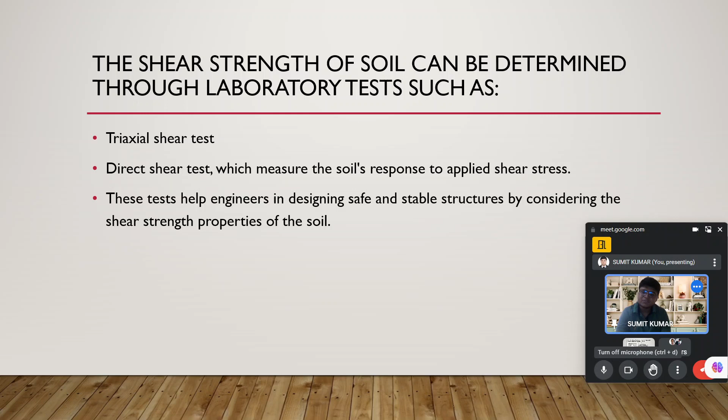This session basically started with the shear strength of soil, and we discussed the shear strength, what it is, and on which parameters like cohesion and angle of internal friction it depends. We also discussed the different types of tests performed on soil, that is the triaxial test and direct shear test. We also took into consideration the vane shear test. Today we are going to solve problems on the direct shear test and vane shear test.

We have understood why shear strength is so important, that at every aspect we are talking about the value of shear strength and how it is important in any of the structures. Because if we are designing the superstructure, we must be aware about the substructure characteristics. Afterward we can say this much load can be taken by this structure, and on that basis we can act.

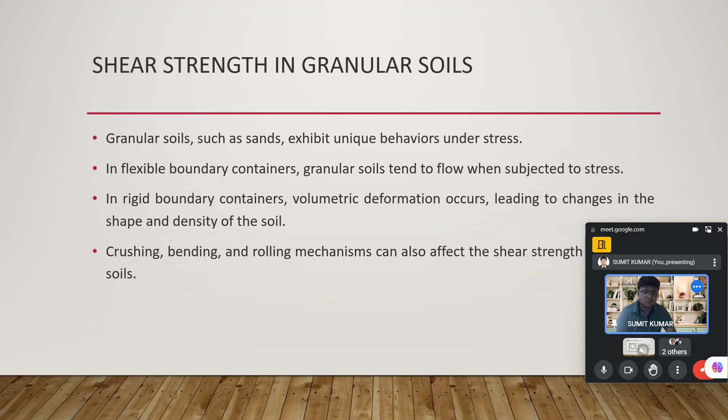So we need to be aware of how we can control the superstructure on a soil by providing those aspects, specifically for structural engineers. So shear strength plays the most important role, depending on cohesive and cohesionless soil. We discussed what parameters govern cohesive soil and what parameters help in cohesionless soil. Apart from that, we also understood that shear strength is the most important key factor in designing the foundation, slopes, retaining walls, and any geotechnical structure.

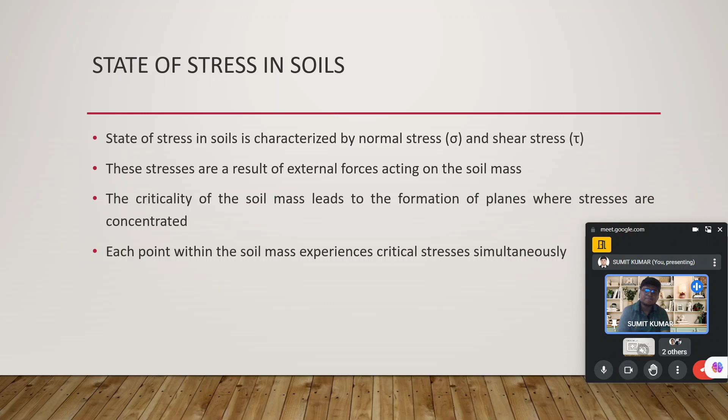We interrelated the relation between normal stress and shear stress. We developed concepts about at what section the soil actually gets failed, and after that we took the concepts of the parent body and detached body. We have discussed this many times, and we will also discuss it again wherever needed, because it is the basic concept from which we are going along.

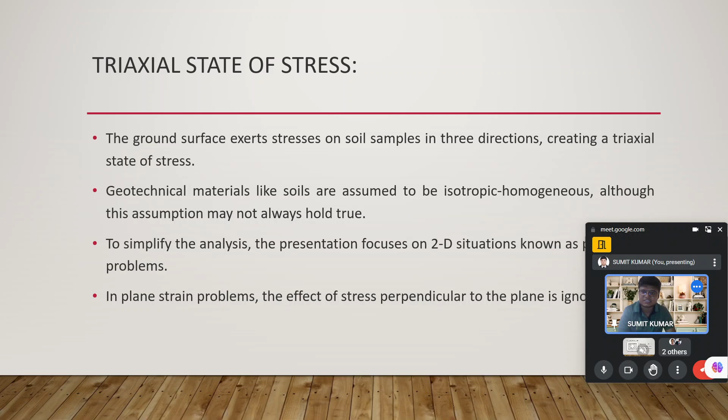I think these things are well understood by you, so I am going in a faster way. This revision session is only for 10 minutes, afterward we will go to a new section. We have seen that the stress is actually acting in the triaxial direction, but we will generalize in two-dimensional cases, and we have discussed those cases.

We interrelated the value of, if we know the two normal stresses in two perpendicular directions, how we can find the stresses at any angle from those two sections, given with this interrelation. We understood the Mohr circle, how it helps, how the center of the Mohr circle is found, how the radius of the Mohr circle is found, and what parameters govern the value of the Mohr circle, whether it lies totally rightward or totally leftward.

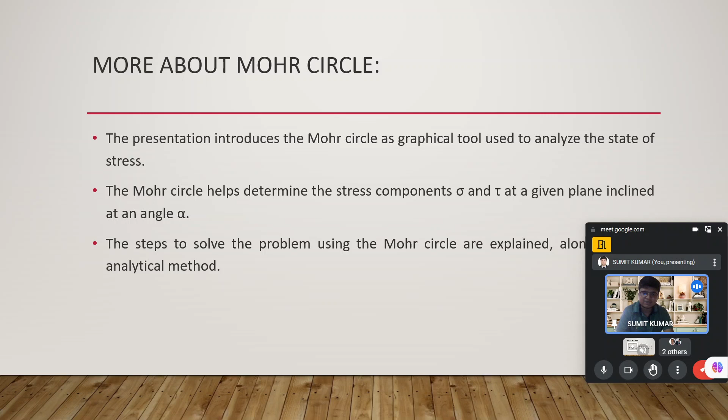We have also taken the cases when the points of the Mohr circle get formed. So those characteristics were discussed during our initial two sessions only.

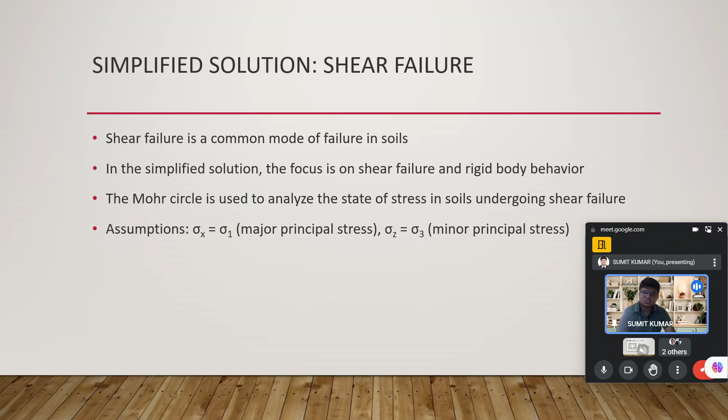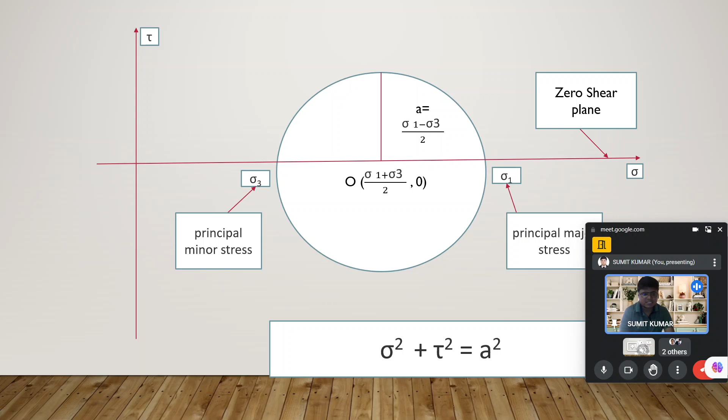We have understood how the Mohr circle gets formed, how the sign conventions work, and how the simplified solution can be developed on the basis of the complex parameters present in the soil. We have generalized the solutions and shown the Mohr circle analysis and the center of the Mohr circle. If we know sigma x, sigma z, or sigma 1, sigma 3, we can find the center of the Mohr circle, the radius, and respectively the major and minor principal stress, using the relation given below, and with that we can form the Mohr circle.

We can generate the radius, and on the basis of that we can also say that at a respective angle from this state of stress, what is the value of normal stress and shear stress, and what the given angle is, stated with the help of the equation tan 2 theta equals 2 tau by sigma x minus sigma z.

And we have solved these problems. I think these problems must have been solved by you at this point of time, so I will not take up the problem again in any case.

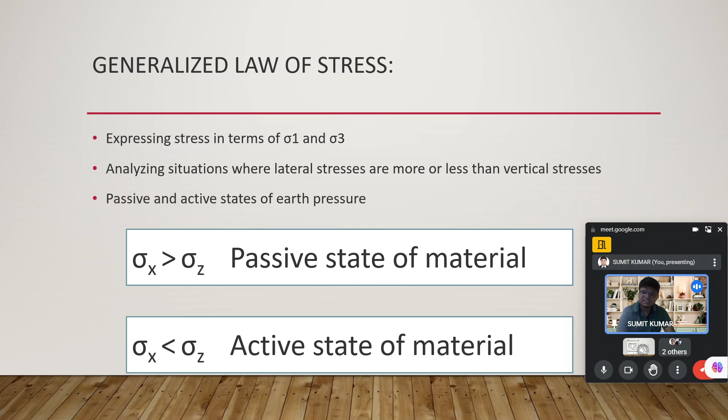But we have understood the value of when the passive and active states get developed in our study. The pole is that point through which all planes of the Mohr circle will pass. We have discussed this concept as well.

Afterward, we have tried to generalize our case, so how we are generalizing is also equally important. The generalization means we have developed the analytical as well as the graphical method. When I say analytical method, you need to understand what I mean by that.

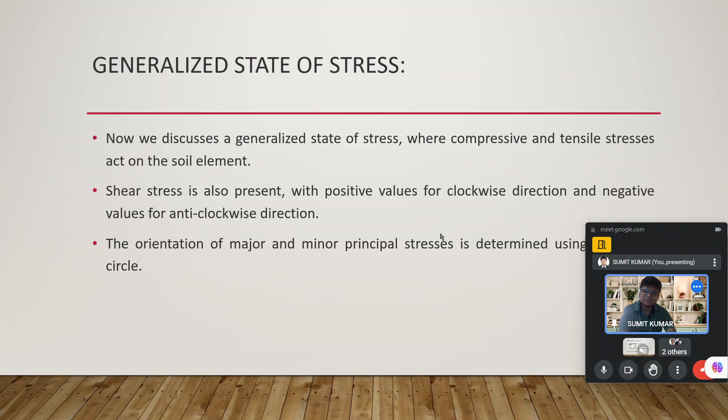Or what is the plane on which different types occur, like when we solve this problem - we solved this problem in the very first class. During this problem solving, we come to understand how the value of stress at any other inclination can be found.

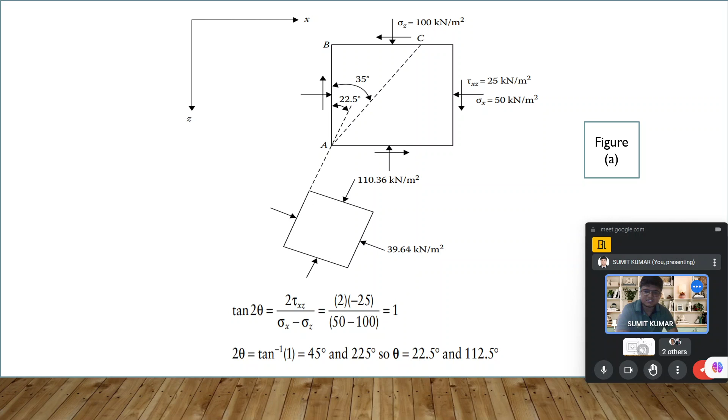And when we solve this problem with the help of the Mohr circle and the analytical approach, we found that the sum of the stresses in the two perpendicular directions, when found at another plane, remains constant. Like the value of sigma p1 plus sigma p3 is equal to 150. Here sigma z plus sigma x is equal to 150, and sigma p1 plus sigma p3 is also 150.

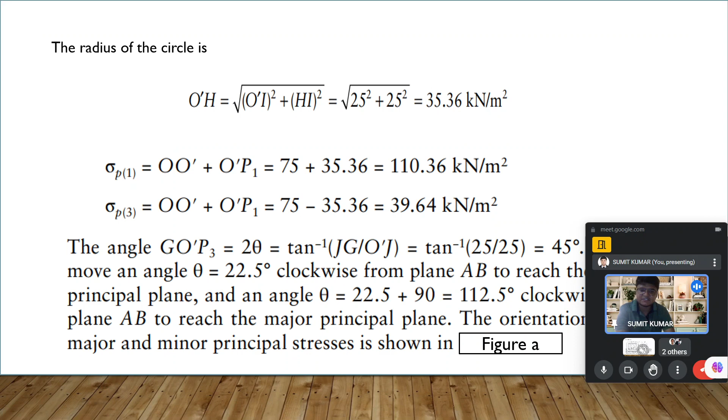So these concepts, why this is happening, we have discussed and understood in a very good way. We have solved the same problem with the help of the Mohr circle - I discussed this in great detail in the first class. You can go across those problems if you haven't seen it.

Afterward, we have understood that shear strength is a function of sigma, and when we say sigma, we normally take the effective stress because we consider the effect of water. We have drawn this diagram, where the intercept on the y-axis is the value of cohesion, and the angle made with the x-axis is the angle of internal friction. On that basis, S equals C plus sigma dash tan phi is our shear strength of soil, and this is the strength. If the applied stress goes beyond that, it will lead to failure of our soil sections.

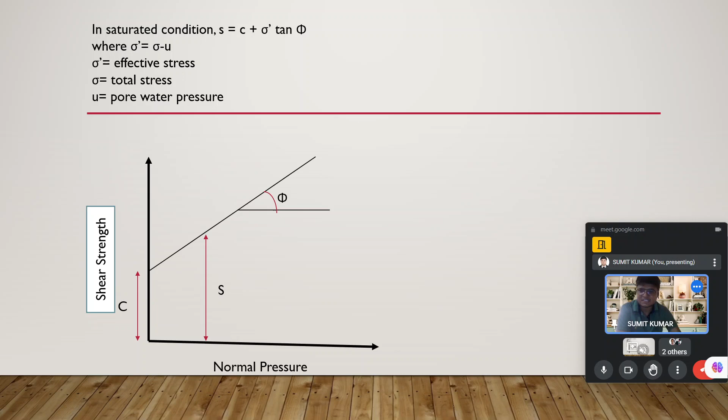And due to this only, the failure takes place. So I think up to this point the concept is clear. I will now discuss the second section to some extent, and afterward I will move to the new content for today, in which we are going to solve at least 14 to 15 problems.

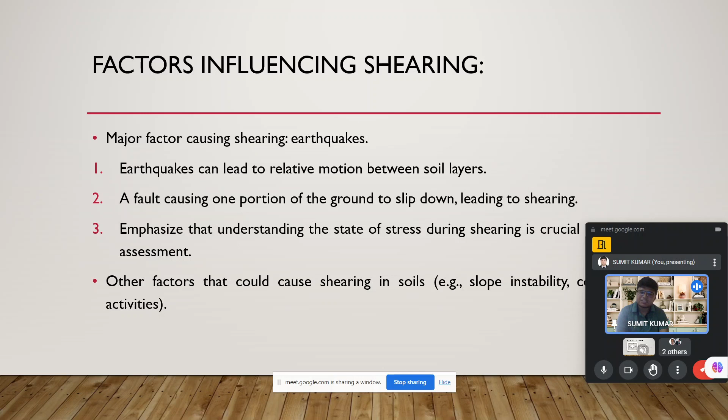Afterward, we studied the triaxial test. In the triaxial test, we perform the test to find the weakest plane. We know that from the weakest plane our soil gets failed. This is understood from the very first class, and I have discussed this again and again because this is the basic concept. Earthquakes can lead to the failure of soil, and other factors like slope instability and construction activity also lead to failures. We have a very good understanding of the application and significance of these facts.

Afterward, we discussed the Coulomb failure criteria. When talking about the triaxial test, we discussed this. Today, when we took the example and solved the problem, we understood that as the value of sigma 3 increases, the value of sigma 1 also changes accordingly, and on that basis, when a tangent is drawn to all the circles that get formed, we are able to find that failure takes place from this section only.

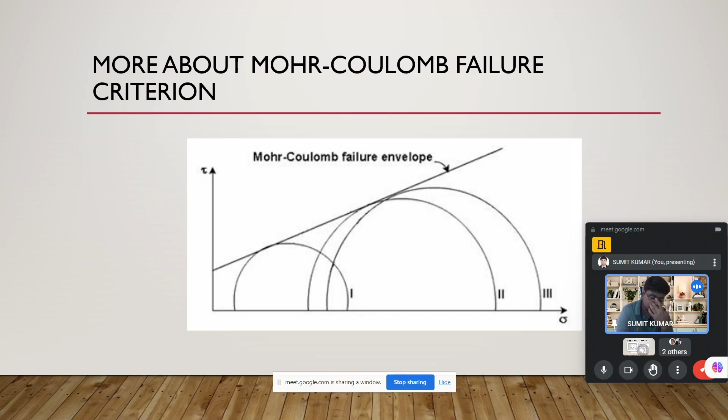This leads to a generalization. When I say generalization, what does this mean? It means one thing: that common tangent is the result of the tangent to all the Mohr circles. So the stress below that point will be called the safe stress, at which the soil doesn't get failed. But if the stress increases beyond that envelope stress, our soil must get failed in those cases. So we need to understand this, and we have discussed this in detail.

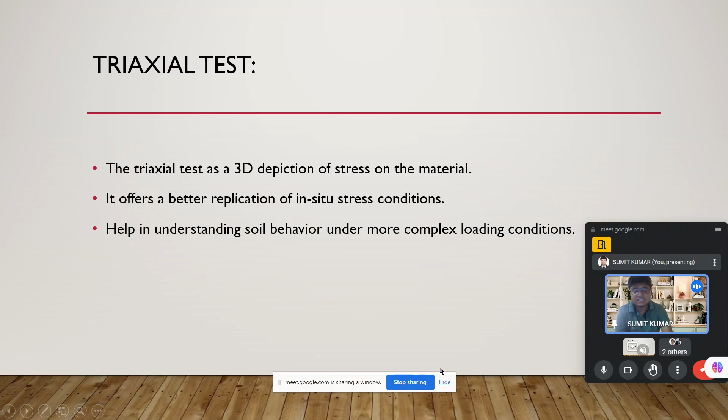Some more points we discussed about the triaxial test, like it being a 3D simulation, an actual representation. When we perform the test, we actually show what is really happening in the field, how stress acts from the three directions we have taken, and apart from that we also found that the stress acting in the field could be simulated in a laboratory in one way or another.

Those understandings get clarified with the help of this test. We also looked at how the apparatus is used, how the stress gets applied, the apparatus presentation, and how the cell pressure gets applied. We perform different types of tests, specifically three types: UU, CU and CD test.

How this takes place and what are the setups we have understood in a very good manner. There are two stages of the triaxial test. The first stage is basically the confining stage in which the cell pressure is applied, and the second stage is when the axial stress is applied, which is nothing but the deviatoric stress. I think up to this, every point is very clear.

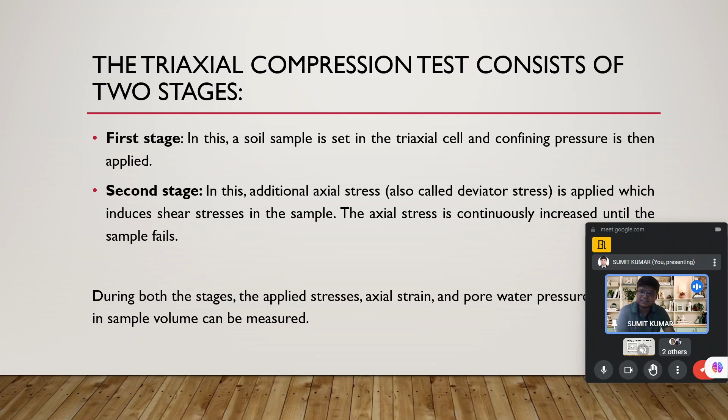First, sigma 3 is applied all across our sample, and afterward the stress in the third direction gets increased. When the third direction stress increases, the value of sigma 1 is found when the soil fails. So we are able to draw the Mohr circle with the help of sigma 1 and sigma 3, because sigma d is nothing but sigma 1 minus sigma 3. This is the apparatus which is already shown.

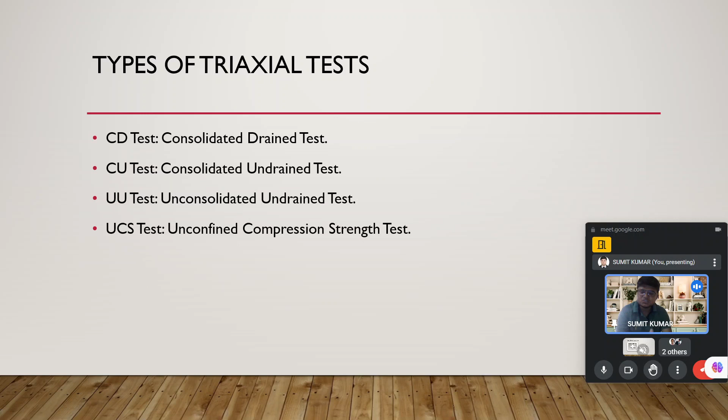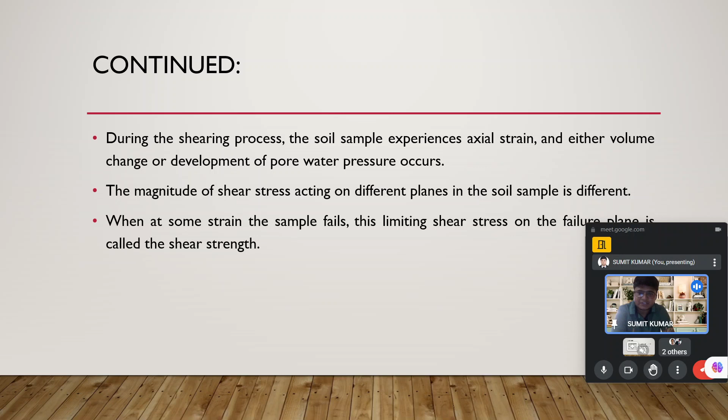We have discussed the purpose of CD, CU, UU and UCS tests in a very good manner during our previous session. We are able to find the cohesion and angle of internal friction, which are the shear strength parameters. With the help of that, we are able to state the property and strength of the soil in a real sense.

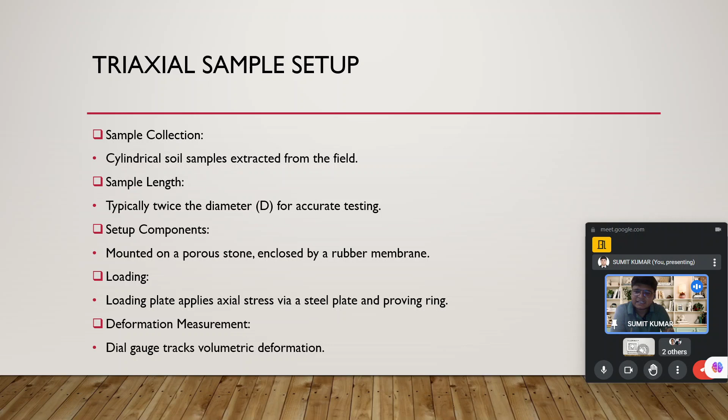Afterward, we studied advanced insights in triaxial testing, where we understood the different types of fluid which could be used in the confining stage, how the load could be applied, and the length to diameter ratio of the sample. We also discussed the different corrections applied, like Ac equal to A by 1 minus delta L by L, epsilon L, during our previous class.

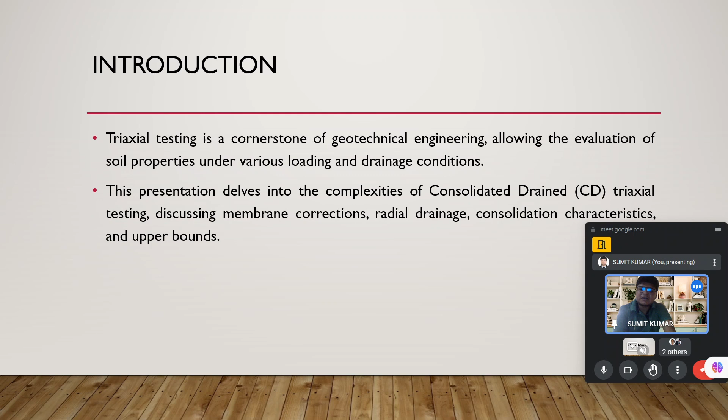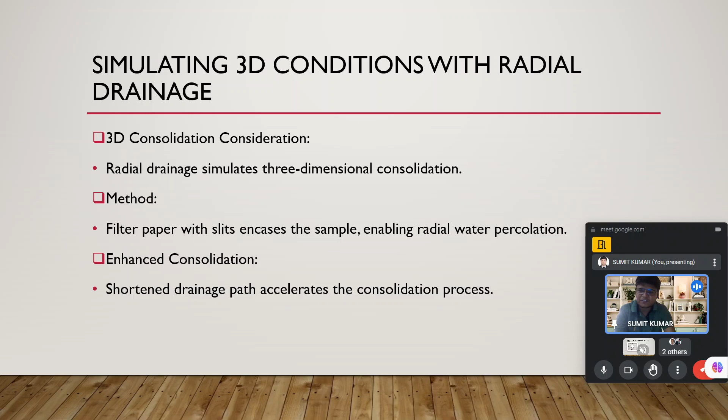So those points you get very easily if you were there during that session, or if you have watched it on YouTube. But in this fast manner you might miss those points, because we took a very good discussion of approximately 15 minutes on that during the last session, as that is the most important case. If you perform that test in the laboratory, you have to be aware about the corrections. If you don't apply the corrections, the value you get will be slightly different from what it should be.

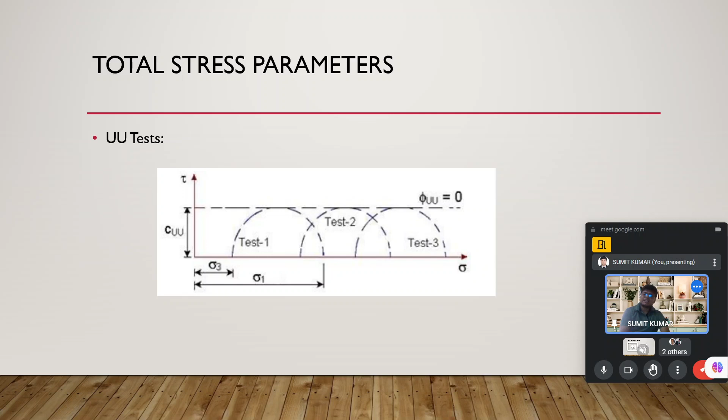Afterward, we understood the total stress parameter and effective stress parameter, and how the total stress parameter acts in the UU test, because in the confining stage and stage 1 and stage 2, the valves get closed and water is not allowed to pass, and the change in volume remains zero during this test.

Apart from that, we understood that when we are performing the effective stress approach, the value of C and phi give the same result for all cases, but this is not the case when we are taking the total stress approach. I think up to this point is very clear to you, as shown in the section written over here.

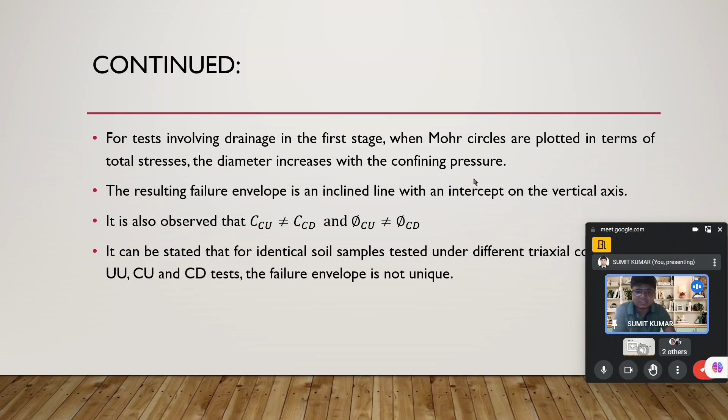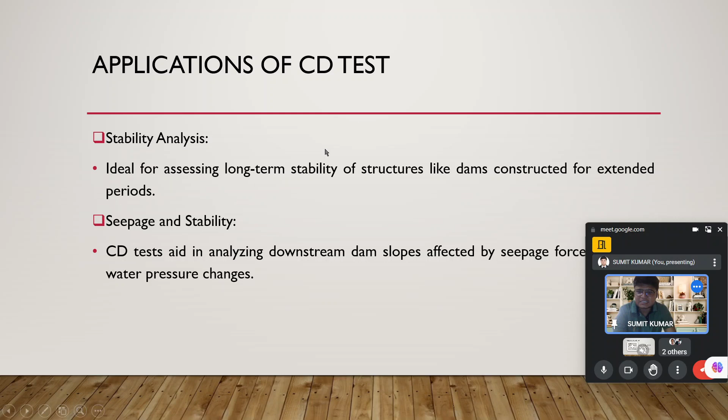And apart from that, we have also developed the relation we are going to use today to solve our problems. This is one of the most important relations, and you must remember it in order to solve the problem. The rest of the things were also used during the sessions.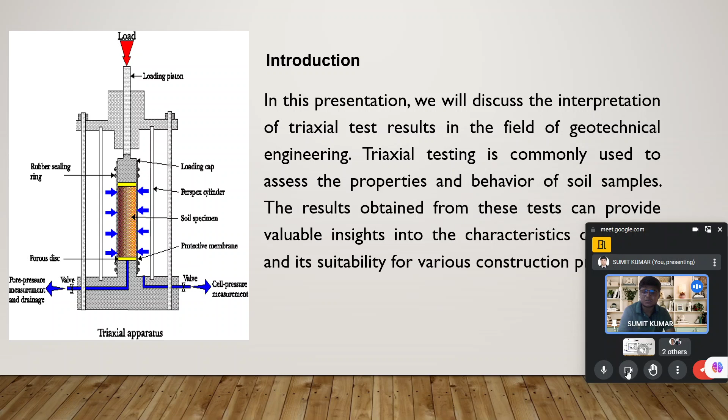There are several parameters we need to assess, and the person who is not aware about this test, who hasn't experienced these sections, may perform the test and give the wrong result. That's why sometimes site engineers prefer some other test over this. But this is also one of the widely used tests in the field of civil engineering.

Now, in our journey through geotechnical engineering, we delve into the analysis of compacted fill material using the triaxial test. This exploration sheds light on the critical interaction between compaction, shear strength, and material behavior. During the last class, you must be aware that we have taken material behavior very seriously.

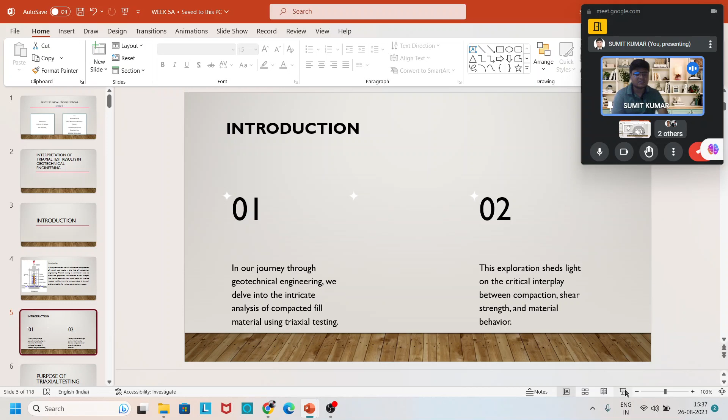During the last session, you must be aware that we discussed the material behavior characteristics which we are able to find during the testing of the triaxial test. Those sections were primarily the focus during that session.

Then we come to the purpose. From the starting class, the purpose and application is one of the important aspects. Whenever we discuss anything, afterwards we ask ourselves what is the purpose, and how we can apply this in the field in day-to-day lives, in civil engineering and different civil engineering works. These things are also among the most important aspects.

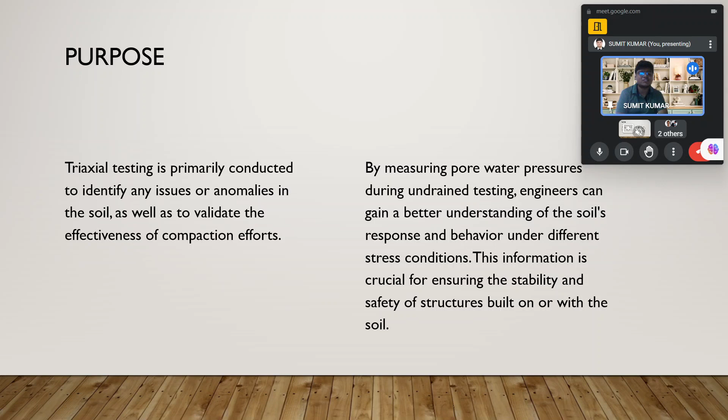The triaxial testing is primarily conducted to identify any issue or anomalies in the soil, to validate the effectiveness of the compaction effort by measuring the pore water pressure. As already said, we are easily able to measure the pore water pressure during triaxial testing, so the understanding of soil behavior can be found in a better manner, and the material characterization we are also able to find. The information we found is crucial for ensuring the stability and safety of the structure built on or with the soil. This is one of the important purposes.

The Mohr Coulomb envelope - the results obtained from triaxial testing are mostly used to develop the Mohr Coulomb envelope. We developed the Mohr Coulomb envelope during an earlier class, where we stated the value of sigma 3, and on the basis of sigma 3 found the value of the deviatoric stress. Afterward, with the help of deviatoric stress, we found the value of sigma 1, and on that basis we found the Mohr circle radius and the coordinate on the x-axis, the sigma axis.

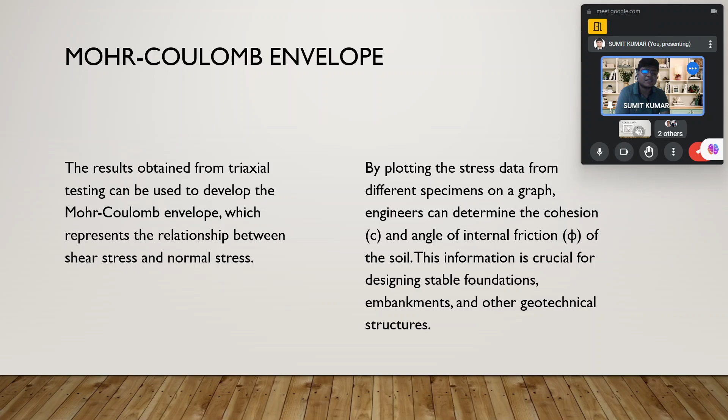By plotting the stress data from the different specimens on a graph, the engineer can determine the cohesion and the angle of internal friction of the soil, and this information is crucial for designing stable foundations, embankments, and other geotechnical structures. So these points become very important.

Now we talk about economic consideration. We have studied the purpose, application, significance, everything. But economy is also one of the great aspects if you talk about a country like India. We must be aware about these facts. Economic consideration is one of the good aspects we should be aware about. If we aren't, we make our structures more costly, and a country like us, which is developing in nature, has achieved so much feat in the field of science and space, as we have seen in the last month as well. But we must be aware about the economic consideration.

When we see the example of Chandrayaan 3, the cost is only approximately 650 crores. But when we compare that with the valuation of what different other countries are performing, they are spending too much, but we have achieved the same or more than what is achieved by other countries by spending much less amount.

So our achievement is also very bright in nature, because we have achieved that feat in an economic way. As a civil engineer, as a geotechnical engineer, we should be aware that whatever we are performing, economic consideration also needs to be taken care of, because if the economic consideration doesn't permit, we are not going to perform those tests or applications. We are not going to implement those things, because economy is one of the most important considerations when we are talking about projects of great concern, like institutional buildings or other important buildings. There, we might think the cost is not the most important factor, we have to develop those sections in a good way only, we are not concerned about the cost. But in day-to-day life, day-to-day constructions, everyone is concerned about the economy. So economic consideration is one of the most important aspects.

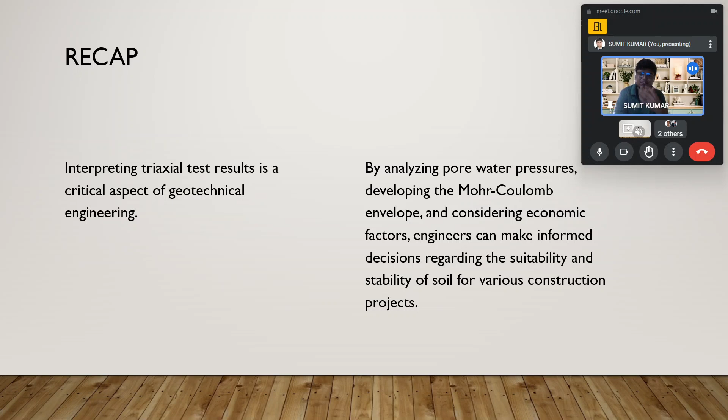Those points are written again, so I will recap this session for you. Interpreting a triaxial test result is a critical aspect of geotechnical engineering. By analyzing the pore water pressure, developing the Mohr circle, the Mohr-Coulomb envelope, and considering the economic factors, engineers can make decisions regarding the sustainability, stability, and suitability of soil for various construction projects which are going to be developed on those sites, with the help of the value of strength, when we state the value of strength.

So now we have already discussed material properties, also one of the important aspects of our discussion. The significance of pore water pressure, building upon the concept of pore water pressure to speculate the soil nature, bridges to the triaxial testing, and the transition to another class of problems centered on compacted fill material is also one of the important aspects when we talk about compaction and soil characterization.

So the reflection of methods like the balloon, sand replacement, and core cutter for in-situ determination. You must be aware about the core cutter method. I will cover the core cutter method and sand replacement here. I will tell you these processes in a faster way. I think you have performed these tests up to now, but I will tell you how we perform them.

First of all, we take our core cutter, which has a dolly attached with it. We take the weight of the core cutter. After that, we take the core cutter to the field. Over there, we insert the core cutter into the field with the help of a hammer.

The hammer weight is approximately 9 kg. Afterward, the section is removed from there, and in the meanwhile, it has been found that the soil which came with that is taken to the lab, and the weight is taken over there.

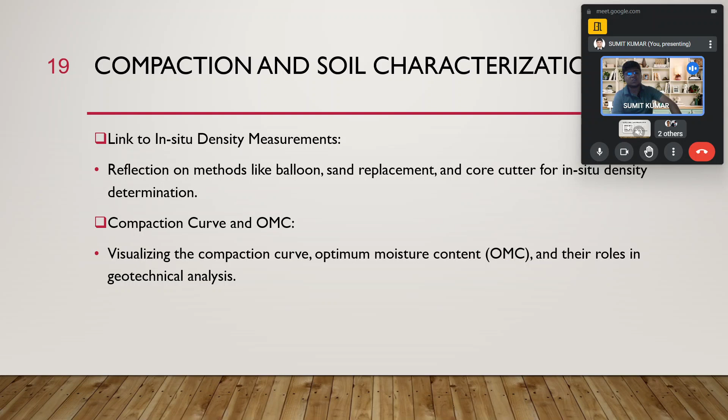Afterward, you must be aware about the Proctor test, like light compaction and heavy compaction tests, with which we are also able to find the optimum moisture content and the maximum dry density for the characterization of soil. So we can state that this type of soil has this characteristic.

And if we find the maximum dry density and the minimum dry density, or the maximum void ratio and minimum void ratio, we are also able to state the value of relative density, and relative density states the property of soil in a broader aspect as compared to void ratio. You must be aware of this fact from the basics of soil mechanics, mostly in geotechnical engineering.

Now, understanding the relationship between deformation and stress on the dry and wet side is also understood. The shear strength comes under shear strength interpretation, and developing a holistic approach involves the particle size distribution, compaction curve, compressibility, and the triaxial test, because with the help of these tests we are able to find these properties.

Now I will state some examples. Okay, give me a minute.

So now we are taking a practical example in which we state how we change the value of sigma 3. Suppose in a test we perform, we change the value of sigma 3 from 150 and progressively increase it by 50 up to 450.

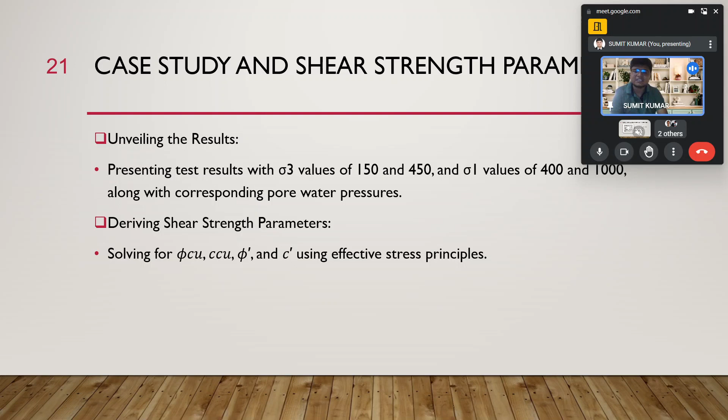Now the interpreting the result. We have to interpret the result, whatever value we are getting. So the effective stress changes, we have to state how the value of stress gets changed. This consideration must need to be understood.

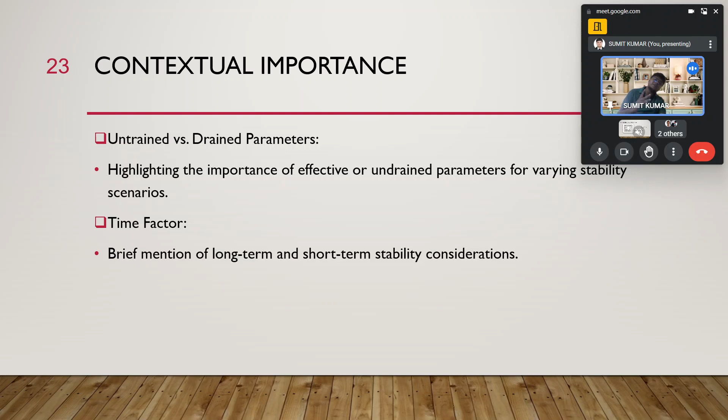Now coming to the next fact, the undrained and drained parameters. When drainage is not allowed, the parameter is called the total stress parameter, total shear stress parameter. But when drainage is allowed, the parameter which we are able to find is called the effective stress parameter. I think that is very clear to you from the earlier discussion as well.

So the journey from soil compaction to shear strength analysis opens up the different layers of geotechnical engineering for understanding, by skillfully combining the laboratory test and the field knowledge. We take the soil sample and perform the test in the laboratory, but when we combine the laboratory test and the field knowledge, engineers can unlock insights crucial for safe and effective exploitation of soil related projects, because any project sustained on this universe is created on the soil only. This aspect needs to be understood by civil engineers before going to design the superstructure.

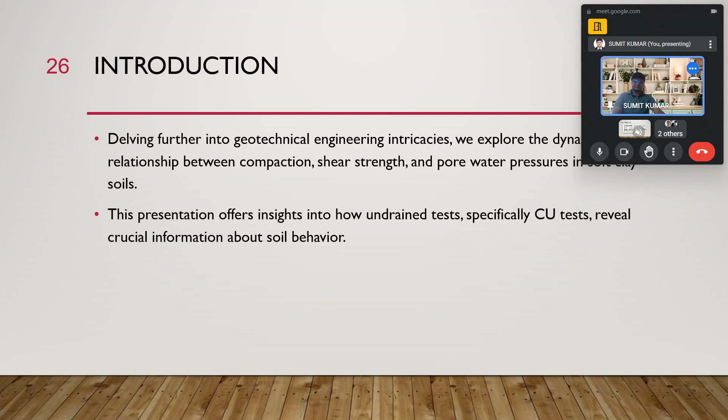Further in geotechnical engineering, we explore the different relationships for compaction, shear strength, and water pressure in different types of soils, like clay soil and cohesive soil. These presentations give insight into how the undrained test, specifically the CU test, reveals crucial information or interrelation. You must be aware about the compaction test which you must have performed during your lab test, and you must perform the UCS test.

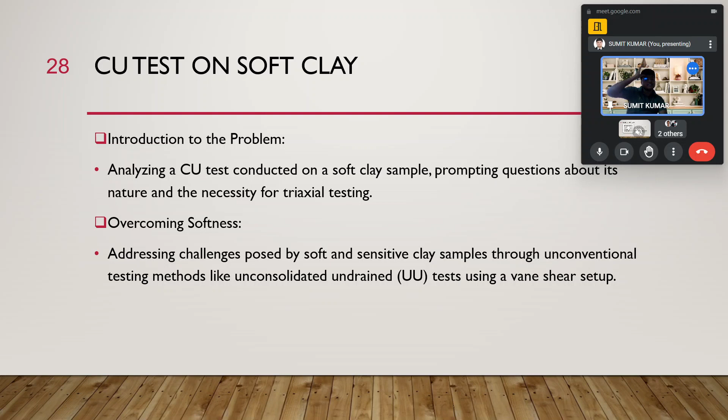The unconsolidated undrained test, like the UU test which I am currently discussing, and the Vane shear test setup - we have discussed that test setup, and on that setup we have already said that this test could be performed on soft soil, otherwise we couldn't apply the torque.

Because in the Vane shear test, torque is the most important parameter. If we are not able to apply the torque, we cannot sustain the result, and we cannot explain the value we are getting from our testing.

Now, extracting the shear strength parameters: we are concerned with finding the value of C dash and phi dash in a real sense, with the effective stress condition. So we must have some problem statement - I will give you a problem statement as an example.

We are not solving the problem at this point; we will solve it today only. We are running out of time, so we are going quickly to the problem, and we'll take up those problems first. After this section is over, we will go straight to the problems.

So we are starting the problem of determining the pore water pressure in a soft clay specimen during undrained testing at a field work.

We have to be significant while interpreting the problem, highlighting the uniqueness. First of all, we have to understand whether the soil is a clay soil or sandy soil. If it is a soft clay, we implement the relation sigma 1 equals sigma 3 tan squared of 45 plus phi by 2, plus 2c tan of 45 plus phi by 2. If the soil is clay soil, we consider the value of phi as 0.

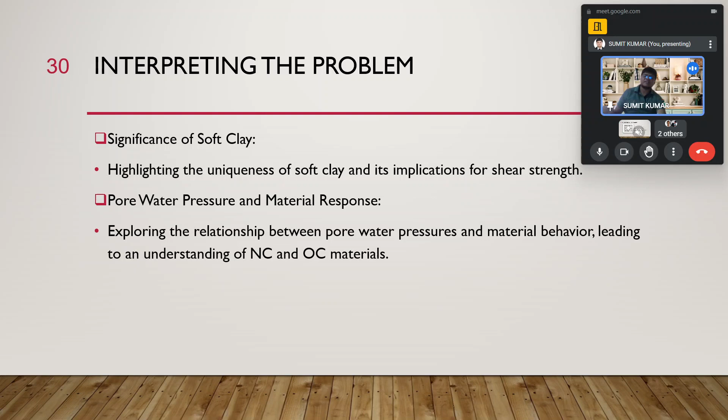Now, the significance of the soft clay, I have discussed this. The NC and OC section is also discussed during the last session. The Mohr circle and its envelope criteria is also stated in a very good manner. Now, analyzing the stress condition and their relevance is also important. The stress condition, when you talk about it, becomes either the total stress condition or the effective stress condition. Basically, the result we stated...

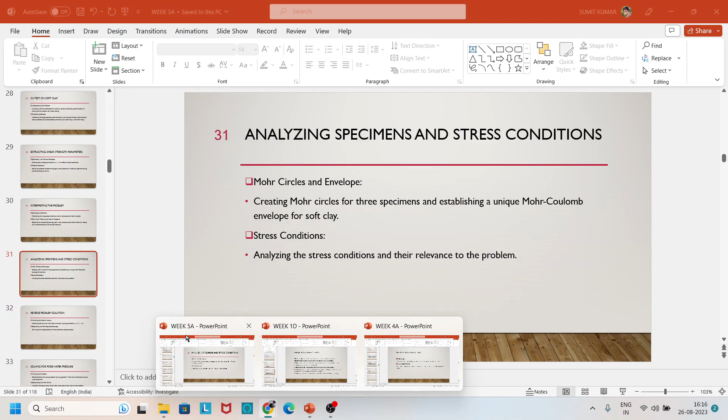Am I audible? Some sound is coming. Hello, anyone's microphone on? Okay, give me a minute, I have to check. I think so, did anyone's microphone get opened? It's going now. Hello. Hello, am I audible? Give me a minute. Hello, I think I'm audible now. Hello, hello. I think the sound is clear. Sorry, I think now everything is okay from my side. There might be some problem from my end, that's why some sound is coming. I will join again with another account so I can check the status during the meeting. I think I am audible, yeah, I am clearly audible.

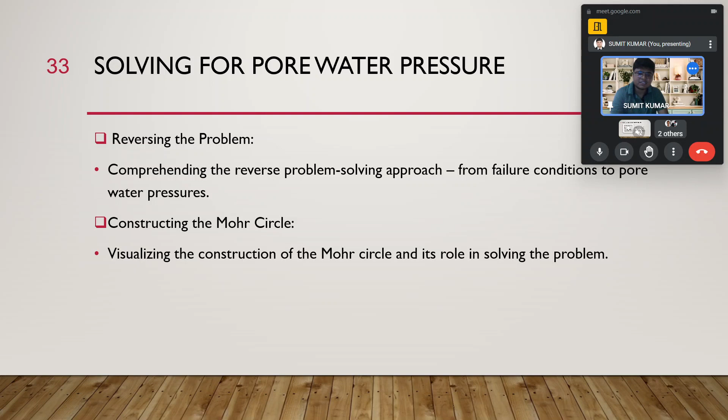Okay, now I will go ahead, the presentation is also visible. So I am discussing the Mohr Coulomb, Mohr circle, and its envelope. We have already discussed this section, I kept it for revision, but since we are short on time, we will go directly to the problems. Afterward we can come back to this section, but it doesn't matter, because our main concern is solving the problem.

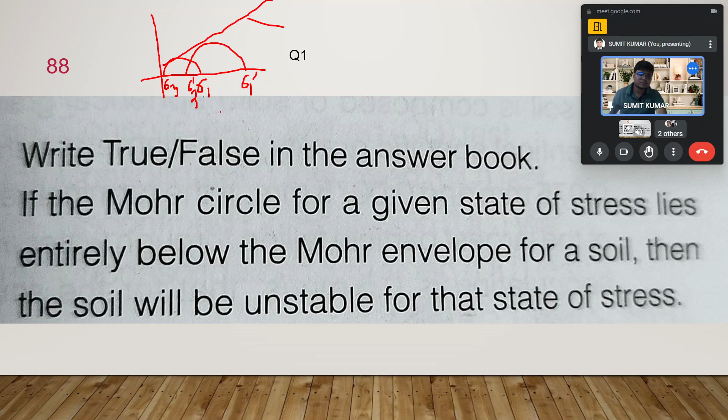Everything is clear. This line represents the Mohr Coulomb failure envelope. I will draw this for you. This is the Mohr Coulomb failure envelope.

Mohr Coulomb failure envelope. So the question states: if the Mohr circle for the given state of stress lies entirely below the Mohr envelope for a soil, then the soil will be unstable. But what we have studied is that stress below the Mohr Coulomb failure envelope remains in a stable state, and stress above or just at the envelope will be in the unstable state. So the answer to this problem is false. I think this is clear.

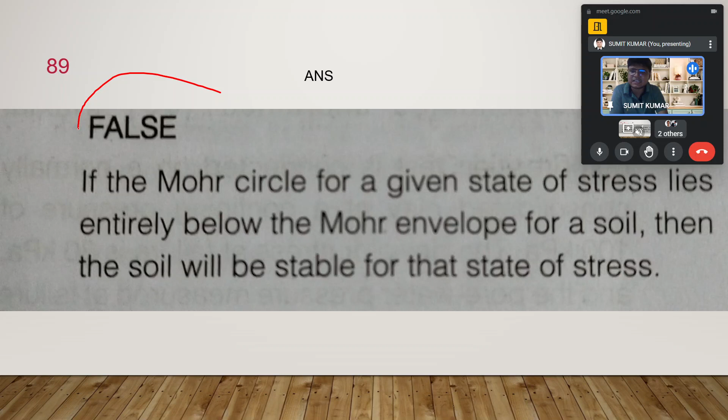Now you can see over here the answer stated is false, exactly what we were discussing. The explanation is also written: if the Mohr circle for the given state of stress lies entirely below the Mohr envelope for the soil, then the soil will be stable for that state of stress. We have understood this with the help of this representation.

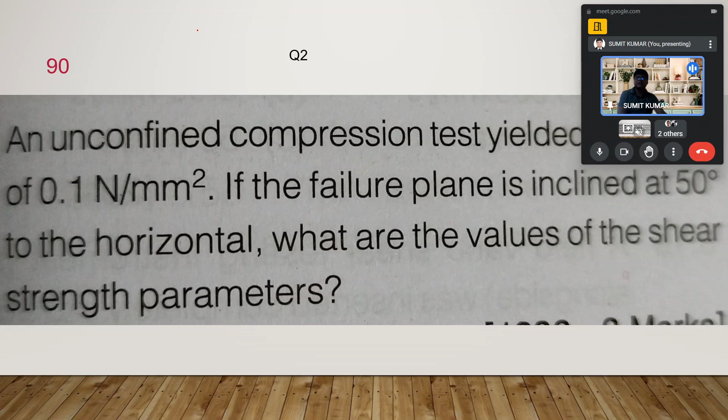Now the next question is about an unconfined compression test yielding a strength of 0.1 Newton per mm square, if the failure plane is inclined at 50 degrees to the horizontal. What is the value of the shear strength parameter? So what is this question asking?

This question is saying in an unconfined compression test yielding a strength of 0.1 Newton per mm square - what is the value of that 0.1 Newton per mm square? You need to understand this. If the failure plane is inclined at 50 degrees to the horizontal plane, then what will be the value of the shear strength parameter?

So basically, we have the value of shear strength, we have the value of phi, we have the value of theta c, and we have to find the value of c. I will again draw this section for you.

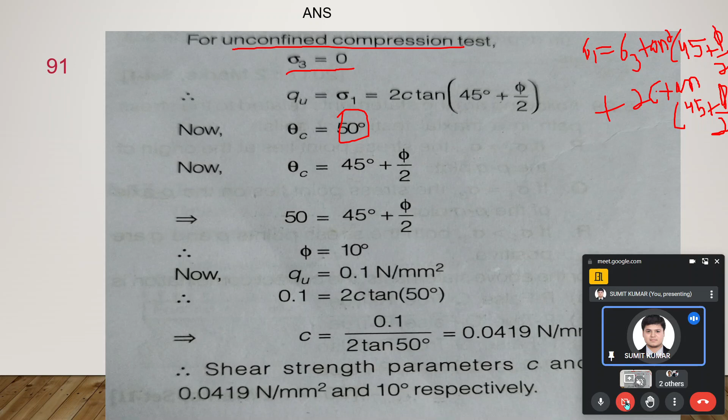So over here you can see the value of sigma 1 equal to sigma 3 times tan square 45 plus phi by 2, plus 2c tan 45 plus phi by 2 is written. In this case we have used the same interrelations, and we have the value of theta c is nothing but 45 plus phi by 2. With the help of that we are able to find the value of phi, and I will again draw with the pen for you. You can see this is the value of the interrelation of theta c equal to 45 plus phi by 2.

With the help of this interrelation, we are able to find the value of phi, and with the help of that, when phi is known, the value of shear strength is also known. That's equal to 2c tan(45 + phi/2). When we use sigma 1 equal to sigma 3 tan square(45 + phi/2) plus 2c tan(45 + phi/2), this relation when used here, we are able to find the value of c as well.

I think this point is clear for everyone. So we are able to find the shear strength parameter. When we say shear strength parameter, what is it? The shear strength parameter is nothing but the value of cohesion and angle of internal friction.

So we are able to get the value of C, as well as the value of phi in this section: C as 0.0419 Newton per mm square and phi as 10 degree.

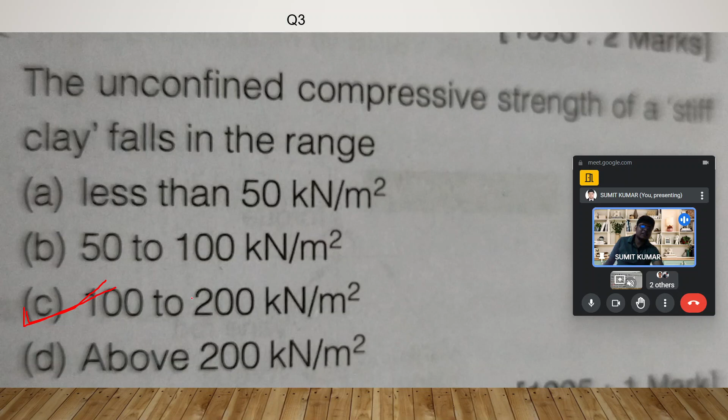But I will not take that much time because I have many problems to solve, so I will state the answer for you. The answer for this problem is: the value lies between 100 to 200 kilonewton per meter square. This will be the answer. This is basically one of the memory-based questions as well, so you must understand that some concepts need to be remembered for giving the answer during the examination. So, unconfined compressive strength of a stiff clay falls in the range of 100 to 200 kilonewton per meter square.

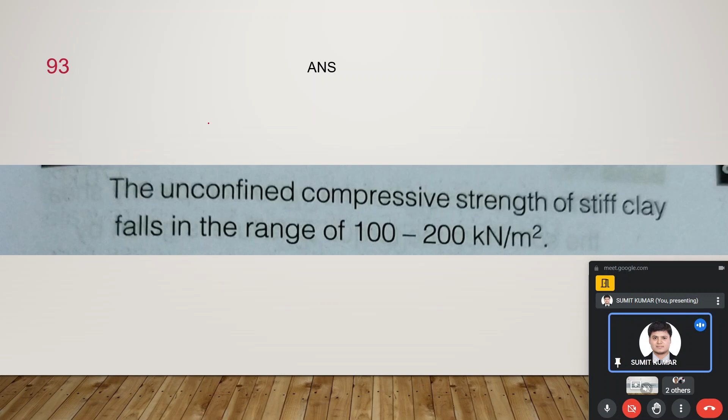Now moving to the next problem. Here I have kept two problems, and the solution for question number 4 and 5 is given on the next page. But first we will read the question. I will state the question, explain it, and afterward show the solution for the given problem as well.

So first, the question is asking: what is the shear strength in terms of effective stress on a plane within a saturated soil mass? Every point is equally important. At a point where the total normal stress is 295 kilopascal, pore water pressure is 120 kilopascal, find the effective stress and shear strength, with parameters C dash as 12 kilopascal and phi dash as 30 degree.

So the C dash value is given, phi dash value is given. The question is asking about the shear strength in terms of effective stress, so the effective shear strength parameters are stated. The soil is saturated, the total normal stress is given as 295 kilopascal, and the pore water pressure is 120 kilopascal. So you have to understand: if total stress is given and pore water pressure is given, you have to find the effective stress by subtracting the pore water pressure value.

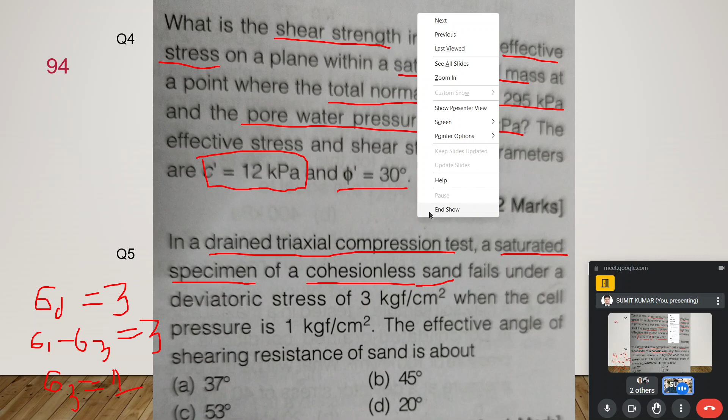I think these things are clear for everyone, because I have discussed and stated this too many times. If it is not clear, you need to work out my last lecture. So the value of sigma 3 is known, sigma 1 minus sigma 3 is known, and sigma d is nothing but sigma 1 minus sigma 3. So now you can state very easily that the value of sigma 1 will be 4.

I need not write it over here, it is also stated on the next page. You can see that sigma 1 minus sigma 3 is the deviatoric stress, stated over here with the value as 3 kg per cm square. After that, we are able to find the value of sigma 1, which is 4.

After that, using the interrelation sigma 1 equal to sigma 3 tan square (45 plus phi by 2) plus 2c tan(45 plus phi by 2) - and it is already stated that this is cohesionless sand, so due to this, C is equal to 0, and due to which we have taken this relation as sigma 1 equal to sigma 3 times tan square of 45 plus phi by 2.

Alpha is nothing but 45 plus phi by 2. So we have solved these equations accordingly and got the value of alpha as 63.43, but we are not interested in the value of alpha, which is 45 plus phi by 2.

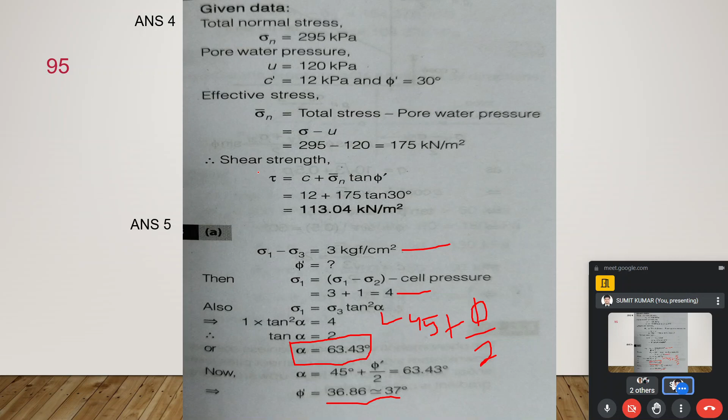Now I will move to the next problem. We have two problems, problem number 6 and problem number 7, and accordingly solutions are also provided. Question number 6 is asked in some examinations as a 2 mark question, but in the normal examination this might be a 5 to 8 mark question, or maybe sometimes a 10 mark question. As I stated earlier, I will take some specific questions during the next class, which are very good problems during the starting of the session.

Please come after solving some of the problems from this topic, so you will be able to understand those things, and you will be able to answer the problem even earlier than during the class. I hope you will come with that mindset.

Sorry, there's a little cough, that's why I'm not feeling very well during this season. But I think whatever I have stated, whatever doubt I had during the season, is understood by you. Oh, I'm sorry for the inconvenience. Give me 1 minute.

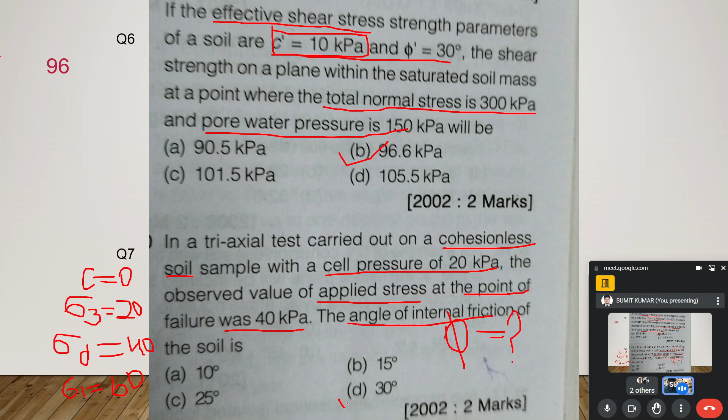So our answer is 30 degrees, so option D is correct. I think up to this point is very clear. Now I will move to the next problem.

The next problem is related to saturated cohesionless soil. Again, the soil is cohesionless, so the C value is 0. Saturated cohesionless soil - first write cohesionless, then C is 0. After that, it is tested in a drained triaxial compression test.

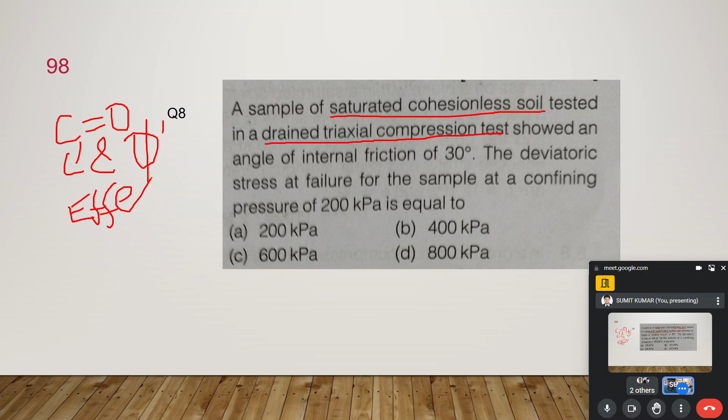Drained triaxial means the value of C dash and phi dash is obtained because the condition is drained. Drain means effective stress. Okay, my handwriting might not be very good because I am writing with the help of a mouse. So C dash and phi dash, C equal to 0, C dash and phi - so the effective stress value would be there.

The value of the deviator stress at the failure of the sample at the confining pressure is 200 kilopascal. So the value of sigma 3 - no, the deviator stress at the failure of the sample - it is asking the deviator stress when the confining stress is given as...

200. So we have to use the interrelation: sigma 1 equal to sigma 3 times tan square (45 plus phi by 2) plus 2c tan(45 plus phi by 2). With the help of that relation, we find the value of sigma 1, and we have to find the value of sigma 1 minus sigma 3 as deviator stress. So we are able to find our solution: 400 kilopascal is our answer. I think up to this point the concept is very clear.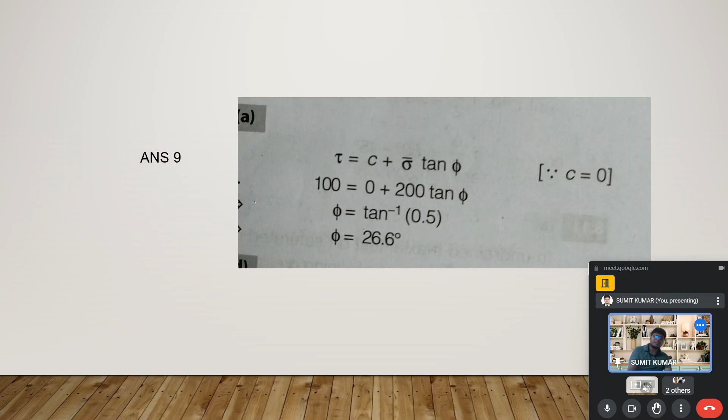I also took one problem of the box shear test for you earlier, so up to this point is very clear - that is done over here as well, so no need to again go for that because I already solved that for you. Now the next problem is here.

This problem asks: a soil is composed of solid spherical grains of a given specific gravity and diameter between 0.075 to 0.0075 mm. If the terminal velocity of the particle falling through water without flocculation is 0.5 mm per second, we have to find it for the smallest particle. This concept we haven't discussed, but since this question is given, I will state the concept behind it. You must understand settling velocity.

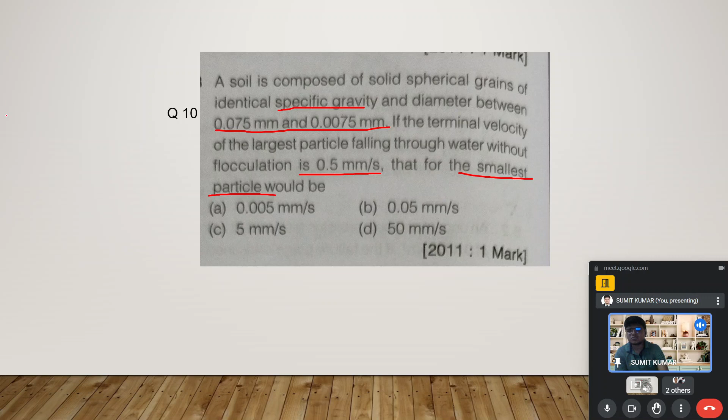The settling velocity is proportional to d square - the velocity is proportional to d square.

Okay, because there is an interrelation, I will write v is equal to (G minus 1) into rho into g into d square, divided by 18 mu. So this relation is there, and using this relation, we can see that v is proportional to d square.

In this problem, it has been stated the terminal velocity for the largest particle falling through water without flocculation is 0.5 mm per second. The largest particle is 0.075, and we have to find the velocity of the smallest particle, that is 0.0075. This is a simple problem: since v is proportional to d square, solving this equation gives the value as 0.005. So our answer is A.

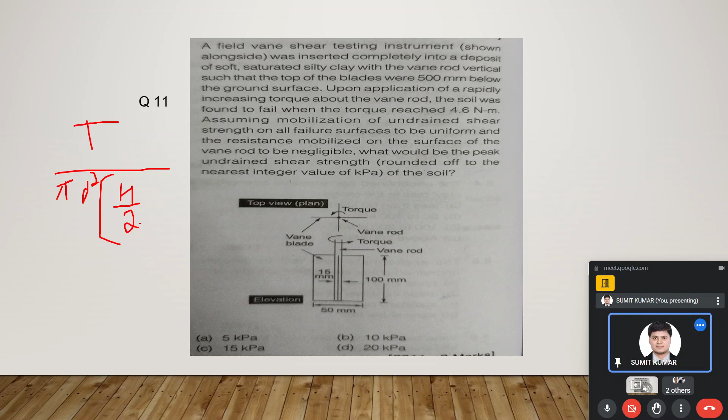First, the value of torque is given as 4.6 Newton meter, and I will state the interrelation for that: S equals T divided by (pi d square into (h by 2 plus d by 6)). This is the value of shear strength.

Here T is given as 4.6, D is given as 50, and H is given as 100. So when you apply this interrelation, you are able to find the value of S. That's all we need to do; other things like the 15 mm and the rest are not relevant for us.

We apply this relation: S equals T divided by (pi d square into (h by 2 plus d by 6)), and with the help of that we are able to find the value of cohesion. So our answer is 10 kilo Pascal.

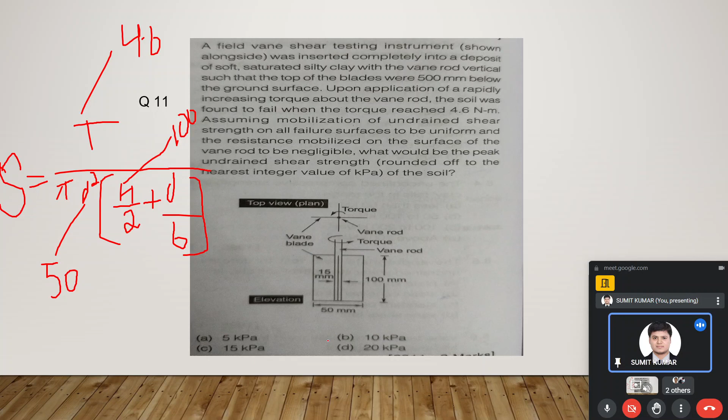This total stress approach, effective stress approach works accordingly as well. Now we move to our next problem. We are moving to the end of our session; we have two more problems, after which we will close the session.

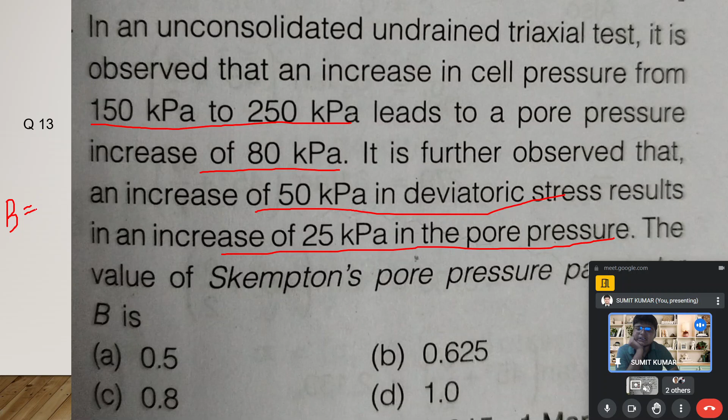So we know the value of B is delta U by delta sigma 3. So the answer is 80 divided by 250 minus 150. So the answer is C, 0.8. I think this is clear.

So we will move ahead. The same thing is solved as well over here. After that, the question we are interested in: a drained triaxial compression test on a saturated clay yields

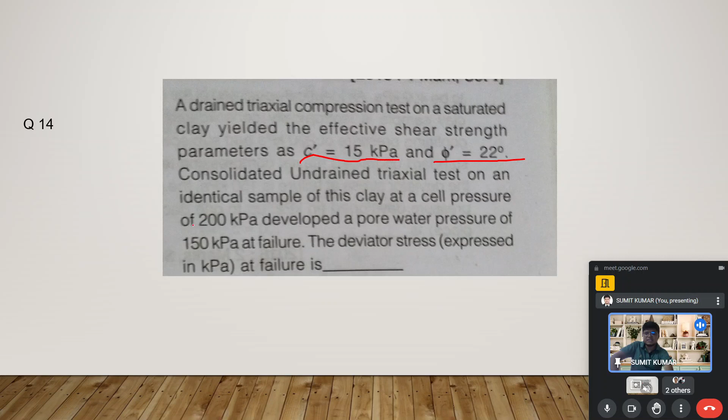effective stress strength C dash as 15 kilopascal and phi dash as 22 degrees. We consolidated and then performed a triaxial test on an identical sample of the clay. The cell pressure developed is 200 kilopascal and the pore water pressure is 150 at failure.

The deviatoric stress is what is asked here. Since time is less, I will show the solution directly; I will not solve it fully over here.

You can see we have the value of sigma 3 as 200, U as 150, and sigma 3 bar, the effective stress, sigma 3 minus U, is 50 kilopascal. The effective shear parameters C dash and phi dash are also stated as 15 and 22 degrees. So we use these values and find sigma 1. When we subtract sigma 1 bar minus sigma 3 bar, we get the value as 104.

So this is the solution of this problem.

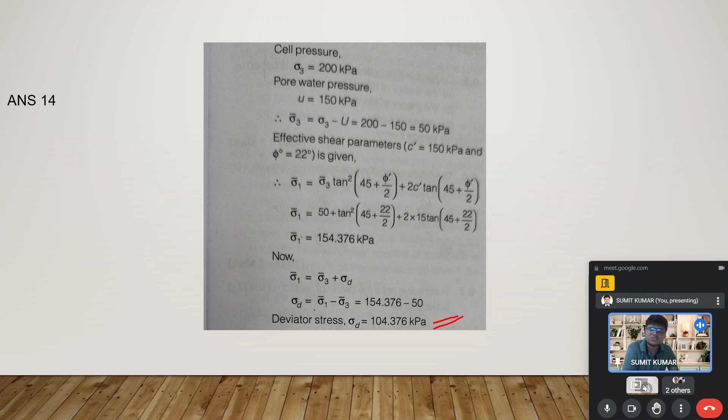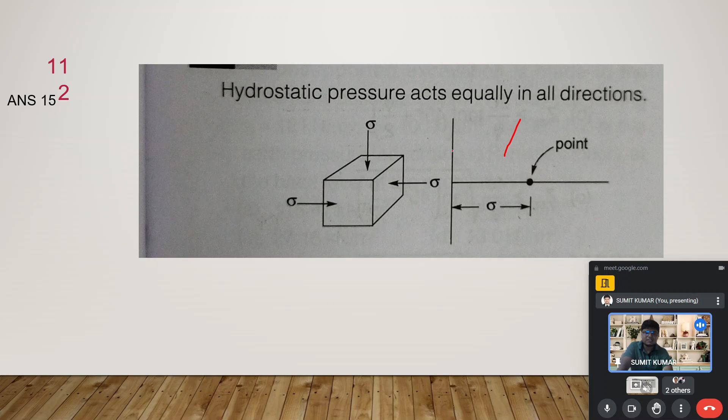So with this, there is one more problem. The one more problem is: a consolidated undrained test is performed, and we find the value of sigma 3 as 100, the confining pressure, and the deviatoric stress at failure is sigma 1 minus sigma 3. The pore water pressure measured at failure is 50 kilopascal.

And one most important homework is to solve the problems which I have discussed today in class, with yourself, with your hand, with your mind — you will get a very good idea. The solution is already there, and I also wrote some things for you, so when you solve it in that manner, it will be more helpful for you.